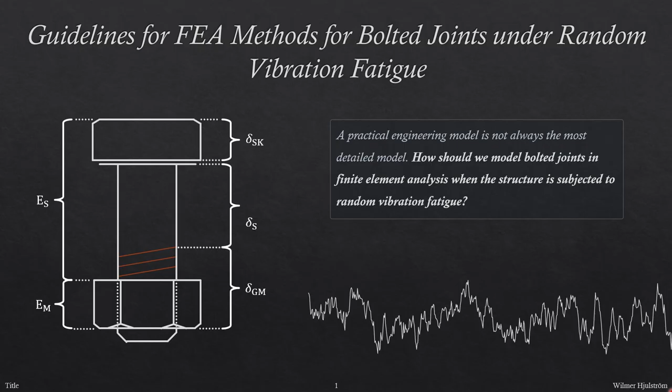My name is Wilmer Hjulström, and today I will present my thesis, Guidelines for FEA Methods for Bolted Joints under Random Vibration Fatigue.

Bolted joints are simple components that can be found in almost any type of mechanical structure. Anywhere from bridges to aircrafts, submarines and cars, you will find bolted joints. But their behavior is not simple when they are subjected to vibrations. When they are subjected to random vibrations, they can experience a wide range of phenomena, including slipping, bolt bending, and fatigue failure.

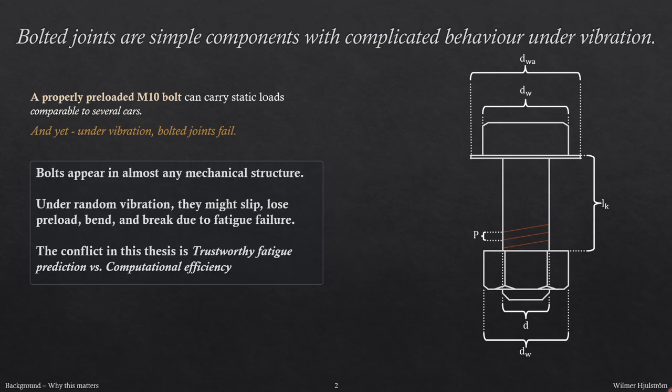The motivation of this thesis is the conflict between trustworthy fatigue prediction and computational efficiency. This work was carried out in collaboration with Combitech, and in industrial FEA, engineers often work with large assemblies containing dozens or even hundreds of bolted joints.

Modeling every single bolted joint as a fully detailed threaded model would be extremely computationally expensive when it comes to preparing, meshing, and solving. Therefore, engineers tend to use simplified models, but the question is not whether simplifications are useful or not. The difficult question is when one specific simplification is acceptable.

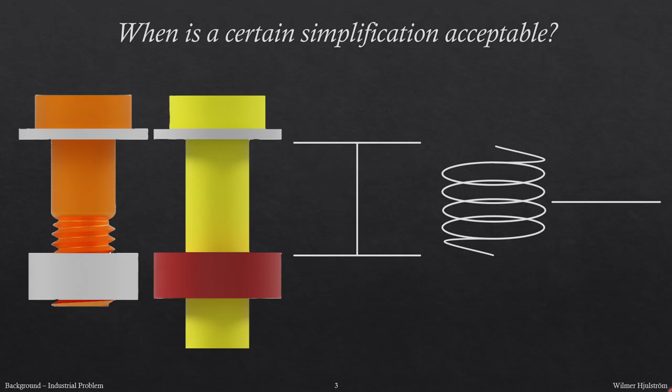The main research question of this thesis is: how can guidelines for finite element modeling of bolted joints be defined to optimize accuracy per cost with respect to fatigue analysis and phenomena caused by random vibration?

My hypothesis is that such guidelines can be formulated based on three components. First is the relevant physical phenomena, second is the fatigue accuracy, and last is the computational cost.

The question that the thesis asks is not which of these bolt representations is the best. It asks how can we choose the cheapest representation that still answers the engineering question with sufficient confidence.

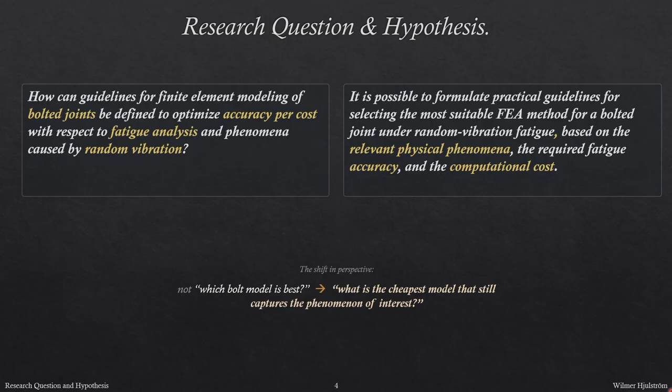Deliverables. The thesis has three main contributions. First is the phenomenon method matrix that connects different phenomena to the analysis type and bolt representation that can capture these phenomena.

Second deliverable is the decision flowchart that works as a map that walks the engineer, based on a set of questions, to a recommended analysis type and bolt representation.

The last contribution is a comparative computational benchmark that aims to quantitatively find how accuracy and cost changes with fidelity or bolt representation.

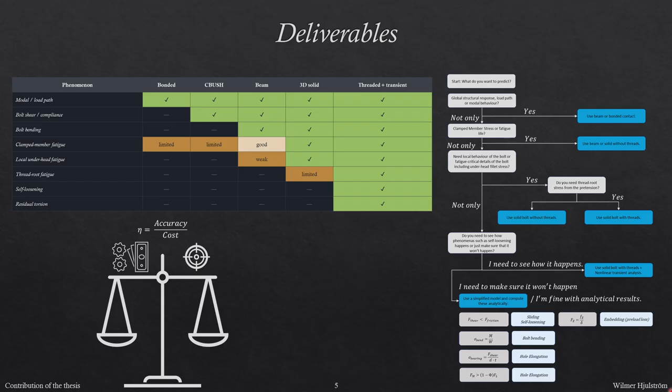Before going into the finite element models, I will briefly explain the analysis chain that is used. First is the input. Two different acceleration PSDs are used as an input. These describe the vibrational environment that the bolts will be subjected to under an experimental physical fatigue test or vibration test.

The top one is the NASA STD-7001B workmanship, and this describes the vibrational environment that electronics in the cockpit of a spacecraft needs to survive to pass a test. The other PSD describes the MIL STD-810G T43A, and it describes the vibrational environment that cargo in a T43A aircraft experiences.

The actual analysis, or the fatigue pipeline, starts with a nonlinear static analysis. That is where we apply the preload, basically tightening the bolt. When this is performed, we freeze the contact state and perform a linear perturbation analysis, where we compute the dynamic response.

From the dynamic response, we can extract the stress PSD tensor. Using this, we can then use the Segalman method to transform this tensor into a scalar Segalman von Mises equivalent stress PSD.

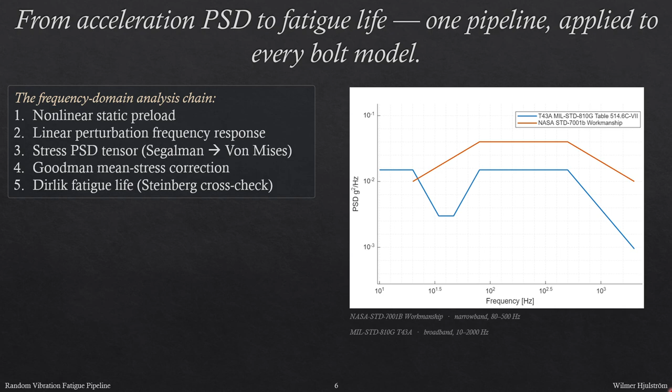I've already mentioned that bolted joints can experience a wide range of phenomena. This thesis addresses 8 different phenomena, and all of these do not require the same type of analysis or same bolt representation. For example, if we know that we don't want any slip at all, then we can use a binary check analytically and compute just to check if the shear force exceeds the friction force or the friction capacity, and see if slipping is a risk at all.

Other quantities or phenomena can be computed with a linear perturbation. This is the type of analysis that is performed in the benchmark. Some quantities that can be found with this type of analysis are stress PSD, bolt bending, and fatigue around a preloaded state. Other phenomena, such as self-loosening or other thread-aware phenomena, require nonlinear transient analysis.

The key point from this slide is that the engineer should not start by deciding to use one type of analysis or one type of representation, but instead start by asking which phenomena will be design driving, which phenomena do I care about.

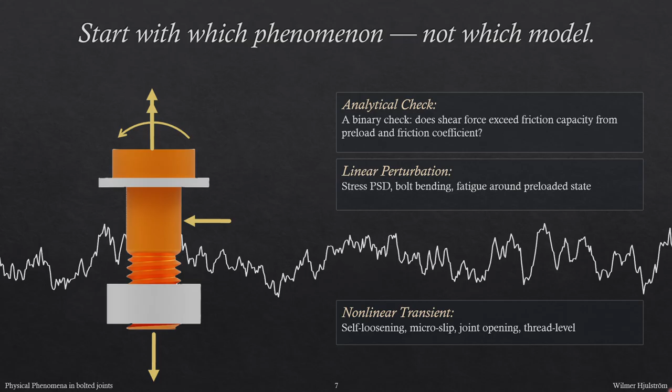No finite bolt model is good or bad in isolation. It is only appropriate or inappropriate depending on the specific engineering question.

In the same line as the last slide, we need to separate different phenomena for different analyses, and also different regions. For global estimates, global responses, or clamped member response, a more simplified model may provide sufficient information, while if you're looking at the bolt itself in local regions, simplifications are generally not as useful as more detailed or high fidelity models. This is why the thesis separates global or clamped member response from local bolt response.

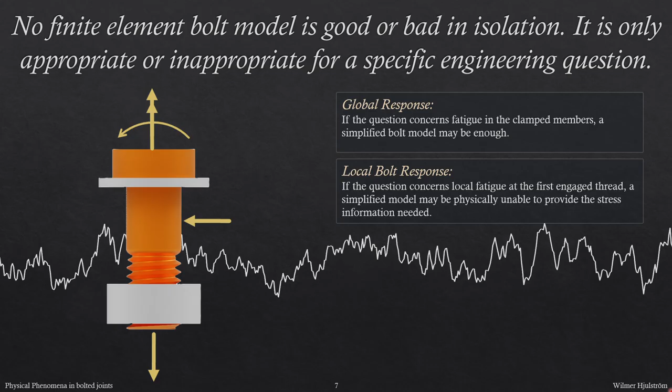The benchmark used is a single bolt benchmark, and in order to make the experiment controlled, only one variable is changing. The mesh is kept constant, the excitation, the loading, the boundary conditions, everything is kept constant except the bolt representation itself.

This benchmark does not claim to represent any type of bolted joint. For example, it does not include any multi-bolt patterns or complex production assemblies.

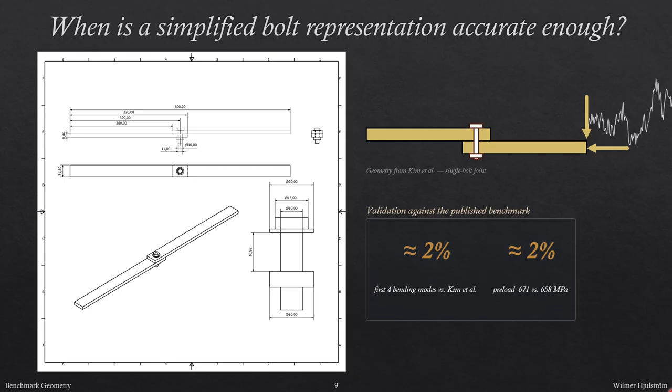These 4 bolts are the representations I used in the benchmark. First is the bonded surface representation, and this is the cheapest and most simplified model. It's cheap and simple, but it also removes the bolt body completely, and it removes the slip degree of freedom.

Next is the CBUSH, which is basically 6 independent linear springs. This is also cheap and very tunable, but this tunability is also a vulnerability because its accuracy is strongly dependent on the input from the engineer.

The third representation is a beam model. Here we give the bolt a beam type behavior, and we can extract axial stress and bending behavior, but we still cannot solve any 3-dimensional stress concentrations.

Last is the threadless solid representation, used as the reference in the benchmark. It can compute 3-dimensional stress transfer and stress concentration in the underhead fillet, but it still does not have any threaded geometry.

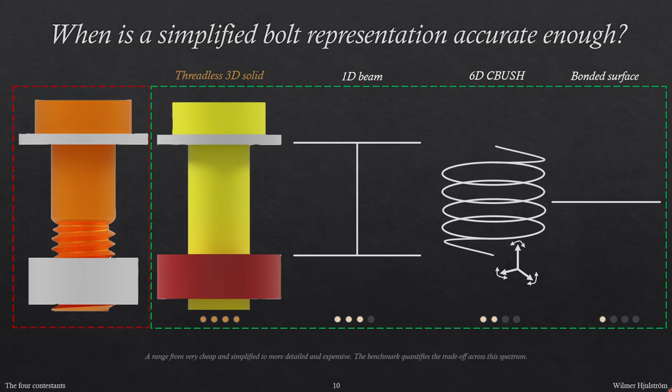One thing to discuss is the use of this threadless solid as a reference, because it's not necessarily the most defensible model to use. More defensible would be to use an experimental test, a measured physical fatigue life.

But this would also require shifting the scope of the thesis from having FEA as the central subject to more of designing the experiment, designing the specimen, having preload control, vibration testing, and experimental post-processing. This is out of scope for this thesis.

Another more defensible model would be a threaded model, and it would make total sense to use this. But under the linear perturbation approach, where we freeze all contact states, the threaded model would behave essentially the same as the threadless model. Therefore, I went with the threadless solid model.

It's still more detailed than the simplified models, but it captures three-dimensional stress transfer, and it is compatible with the linear perturbation.

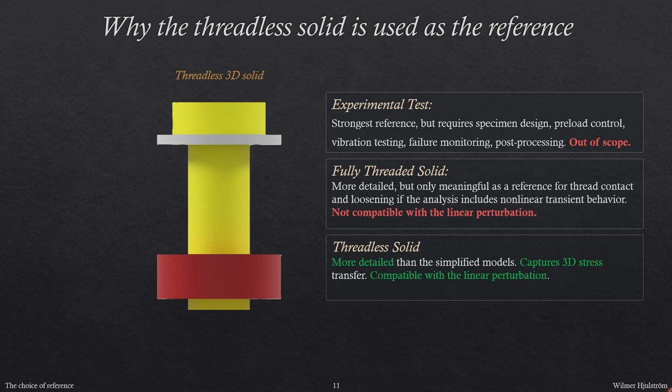16 simulation cases were done. I already told you about the two inputs, the two acceleration PSDs, and the four models. The excitation was then put in two different directions, horizontal and vertical. These are not performed simultaneously, so it is two different directions times two different PSDs times four models. This is 16 cases.

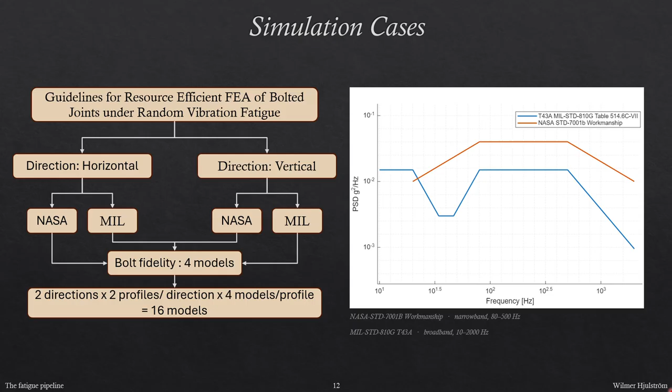Fatigue failure would happen in one of three regions in a bolted joint. The first region is the clamped member region, close to the hole. This is the only region that is identical across all four representations, so it is also the only region where the models can be compared directly.

The other two regions are local bolt regions. The CBUSH and the bonded model have no physical body to extract stress from. Still, we have the beam and the solid. The beam provides a finite stress response, but it cannot capture the stress concentrations. The solid can.

Three main quantities were extracted from these regions: first, the stress PSD; second, the RMS von Mises stress; and third, the Goodman-corrected Dirlik fatigue life.

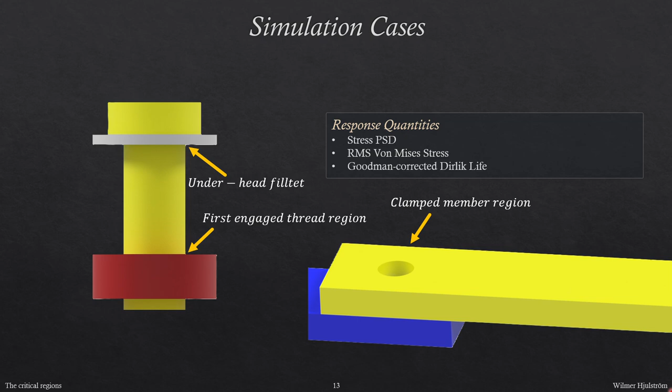In order to compare these representations, a ranking index was constructed. It combines three different errors: the minimum Dirlik fatigue life, the relative error in maximum RMS von Mises stress, and the relative error in the 95th percentile RMS stress. This is normalized so that a score of 100 means perfect agreement with the reference.

The cost function is also a construction, involving the mean value of wall-clock time and CPU time, and this is also normalized so that a score of 100 means perfect agreement with the reference. Efficiency is defined as ranking index divided by cost, and an efficiency of more than one means we get a higher ranking index per unit cost than for the reference.

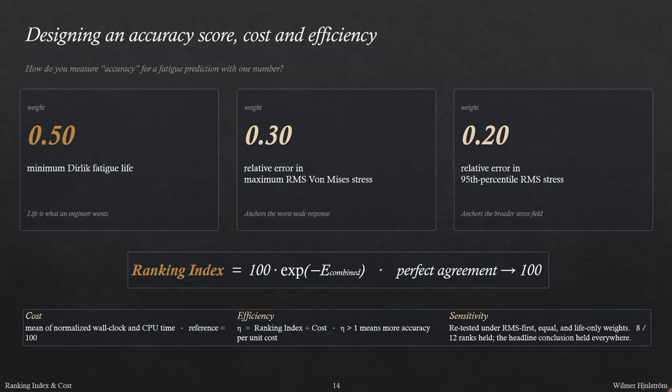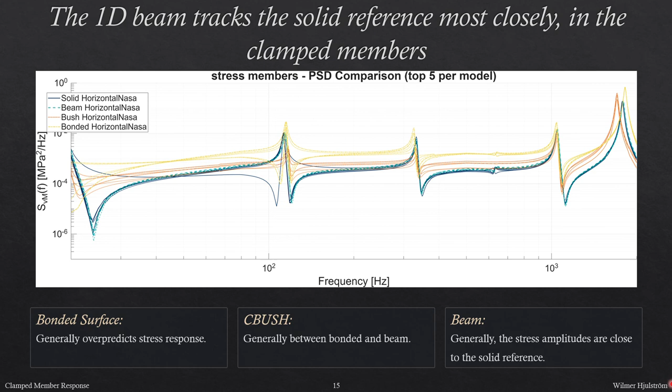Looking into the local regions, once again, we cannot extract any stress from the C-bush or the bonded model when it comes to local regions, but we can from beam and from the solid. And since the beam cannot extract any stress concentrations, it also gives a much lower level of stress and therefore is non-conservative when it comes to fatigue life.

The interpretation of these two last slides is that the beam model is preferred for this benchmark when it comes to clamped member fatigue, but when it comes to local bolt fatigue, a three-dimensional representation is required or preferred.

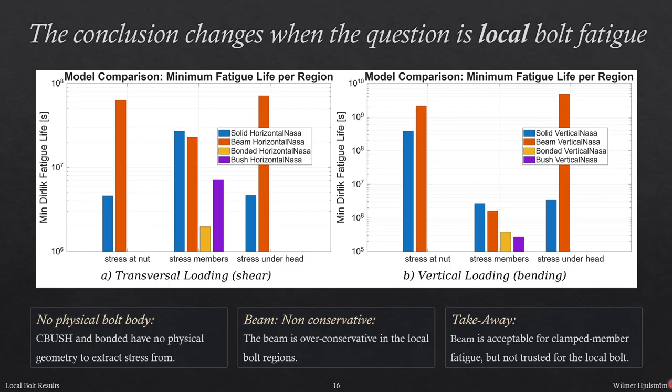I mentioned in the analysis that I used the Dirlik method to compute the fatigue life or fatigue damage rate. But this is not the only method there is. There is also one other common method, the Steinberg method. In order to see whether the ranking is an artifact or dependent on the method, I decided to compare these two, and the answer is that it is not dependent, because at least these two methods agree very closely for critical nodes that has shorter lives, the design driving nodes.

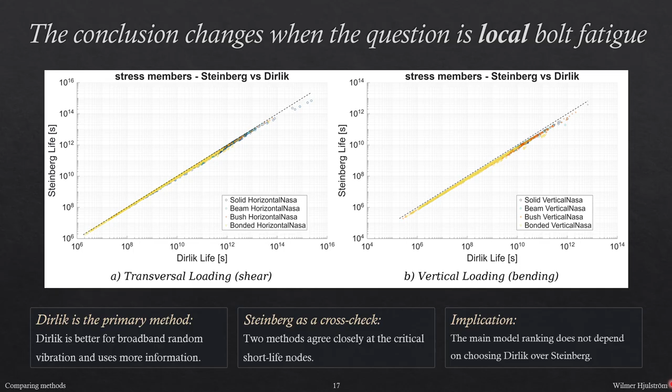The cost results show that the bonded and the Bush model are much cheaper than the beam or the solid, and they are also more efficient in this definition of efficiency. But I don't think that this sort of efficiency is something that should be used to validate a choice of models, because even though these are efficient, looking just at the Pareto front, the beam would not be considered. But the beam can provide much more information than these models, and that should be something that is more decision driving than anything else.

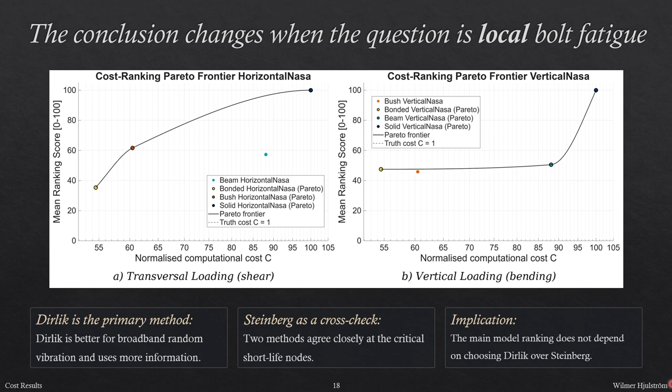The first deliverable I also mentioned briefly is the phenomenon method matrix, meant to connect a phenomenon to methods and representations. For example, if the engineer needs to see slipping as a binary check, the engineer can look here and see that an analytical approach with a bonded model is good enough. If the engineer wants to see underhead fillet stress, then it shows that we need a threadless solid. Some other phenomena, such as self-loosening, needs a nonlinear transient analysis and a threaded solid. This matrix helps the engineer to not under-model or over-model the representation, and it also sort of gives a feeling that

We don't need to put cost here. We can put the cost somewhere else, or the work.

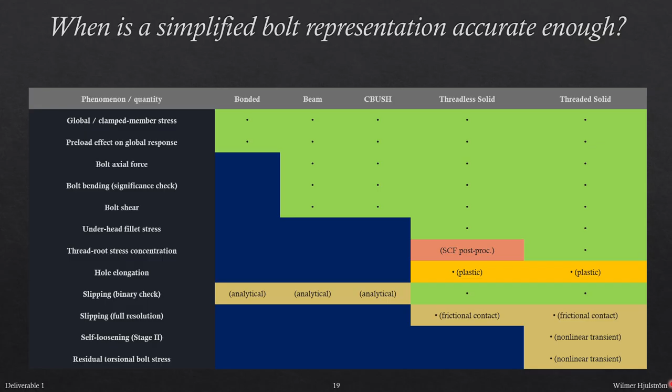Next, a deliverable is the decision flow chart, the map, and this walks the engineer based on a set of questions into a recommended bolt representation and analysis type. For example, same example as in the matrix, if the question regards slip risk, then it will point towards an analytical check. If the question regards clamped member fatigue, then it will point towards a linear perturbation, and based on the benchmark, it will also recommend using a beam model.

These deliverables are not meant to be a substitute for engineering judgment. It is only a way to be more transparent in the decisions and make any choices or decisions more repeatable and easier to justify.

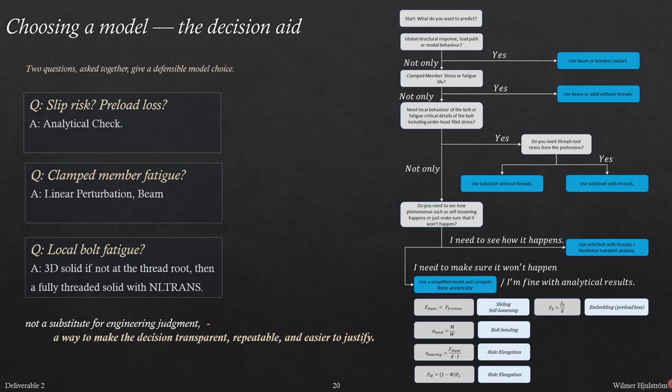Some important limitations are these four. First of all, the single bolt benchmark cannot represent any type of joint, so the model and the ranking index and the other deliverables should be revalidated for multiple patterns or complex assemblies. The threadless numerical reference is not measured physical fatigue life, and it should also be compared to some sort of experiment or test.

The linear perturbation removes many physical phenomena; any nonlinearity is not captured. And the single axis excitation is also a limitation. Multi-axial excitation might give different answers, different results or conclusions.

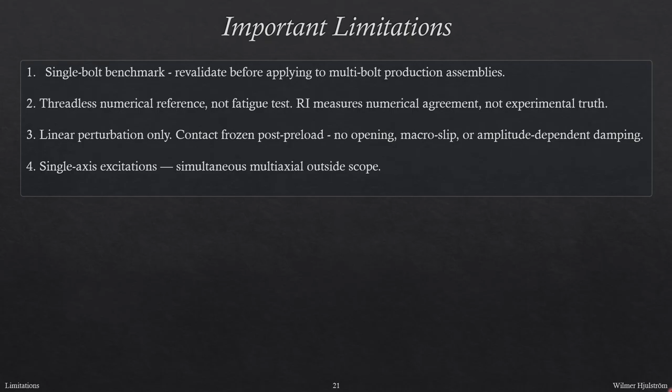Main conclusions: there is no single best representation. It is case dependent and should be looked into for every single case. For clamped member fatigue, in this benchmark, the 1D beam is the preferred choice. For local bolt fatigue, three-dimensional solid is required. And for thread level phenomena, a thread-aware and a transient analysis is needed. That's it.